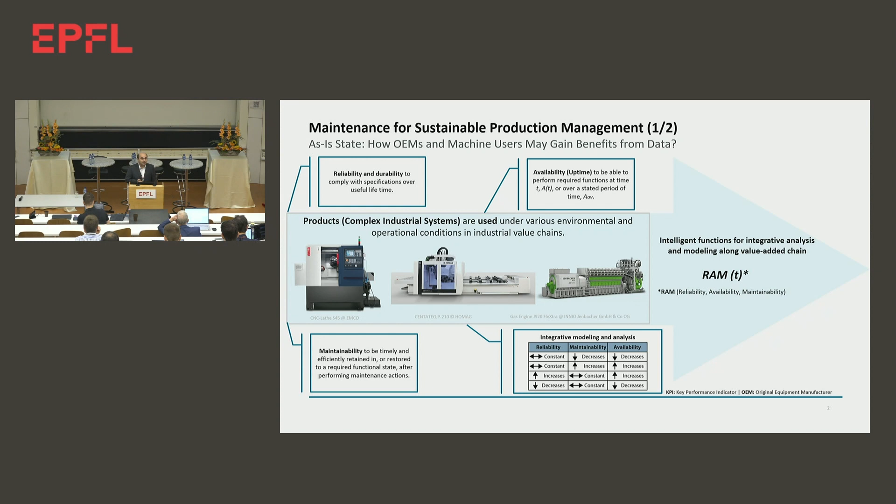So both sides, OEMs and machine users, share the view that they want to gain some sort of benefits from the data to build intelligent functions for integrative analysis and modeling of these factors. And in this indicator scheme, where we have theoretical relations between all these indicators and key performance indicators, what is missing is sustainability.

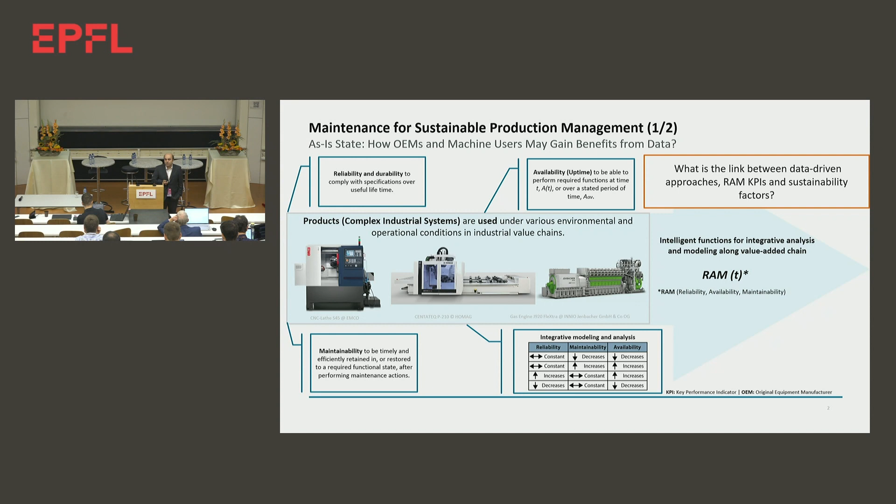So if we come into the problem space that we have with regard to sustainability, we could start from the triple bottom line of sustainability: the environmental conservation issues, the 2050 goal for reducing emissions and achieving net zero; then the economic enhancement, optimizing life cycle costing; and further on the social efficiency, reducing the most error-prone source of failures, that is human, actually.

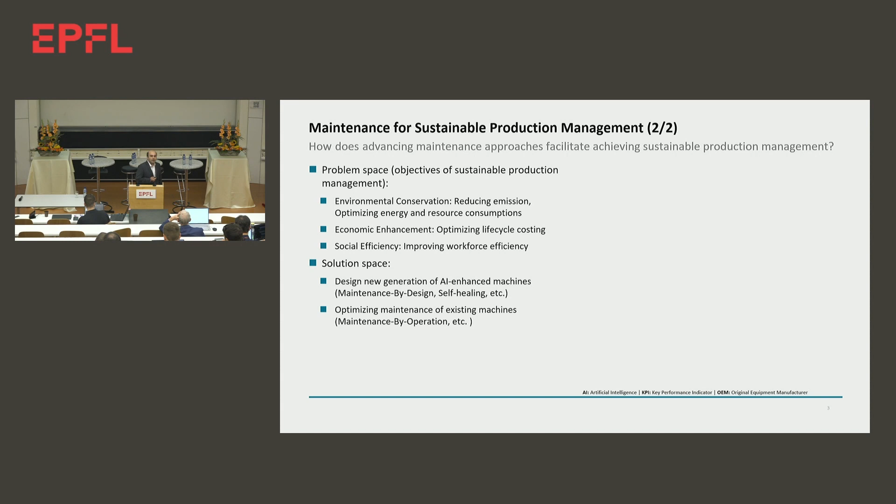And on the solution space, when we are really focusing on maintenance, we see that there are two major approaches. One is introducing new kinds of machines into the shop floors, AI-enhanced machines. So maintenance by design comes into discussion, and we have heard some talks about this topic from the side of the OEMs. And the other side is maintenance by operation, so extending the remaining useful lifetime of the machine.

And when we focus on the first research direction, we see that it has some sort of contradiction to the topics of sustainability, because we are putting a lot of resources, physical, virtual, and human resources, at the service of designing and operating these machines in the shop floors.

So the research question for us over the past, let's say, 7 years concerns the use of multi-channel data sources and existing prior knowledge, as well as human experiences, for increasing efficiency in the planning and operating of maintenance activities. When I talk about maintenance optimization, I refer to the operational, tactical, and also managerial issues that we have, all data-driven, and relating those aspects to sustainability.

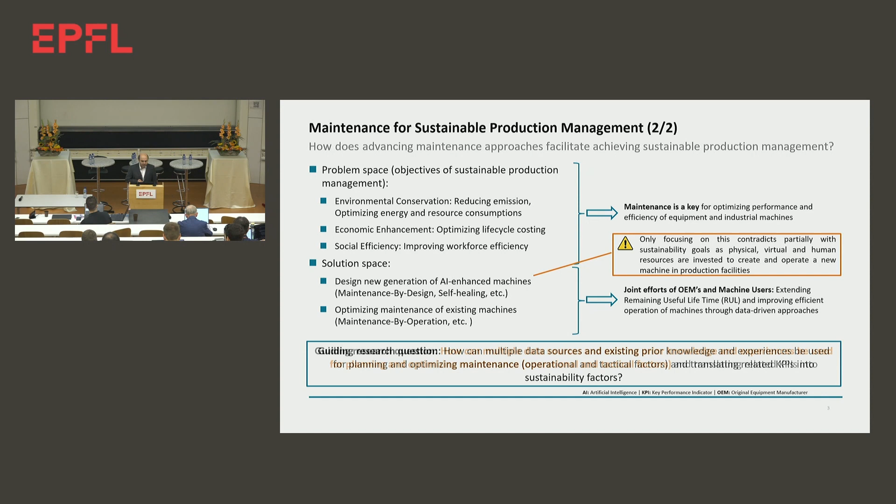So as an impulse, we believe that maintenance is the key for optimizing performance and achieving sustainability, and the joint efforts of OEMs and machine users are demanded to achieve this goal. So let us continue with this topic of knowledge-based maintenance to make it a little bit more understandable for you.

What we mean by knowledge-based maintenance is integrating predictive and prescriptive maintenance. It is based on top of condition monitoring and the other approaches that we use for automatic diagnostics. When we talk about predictive and prescriptive maintenance, there are certain challenges that we need to consider. First of all, the well-known challenge of proper use of multiple data sources.

Then on top of this is the suboptimal use of multi-structured data. We mainly focus on the sensors, forgetting the huge amount of so-called textual data, for example. And when we have multi-structured data, we need to deal with the multimodality of the data. So we need to establish some sort of semantic relations between the information that we are extracting out of the data, either structured or unstructured.

And not forgetting that in the companies, we have multiple strategies for operating the machines: different, sometimes contradicting, reliability-centered and maintenance strategies.

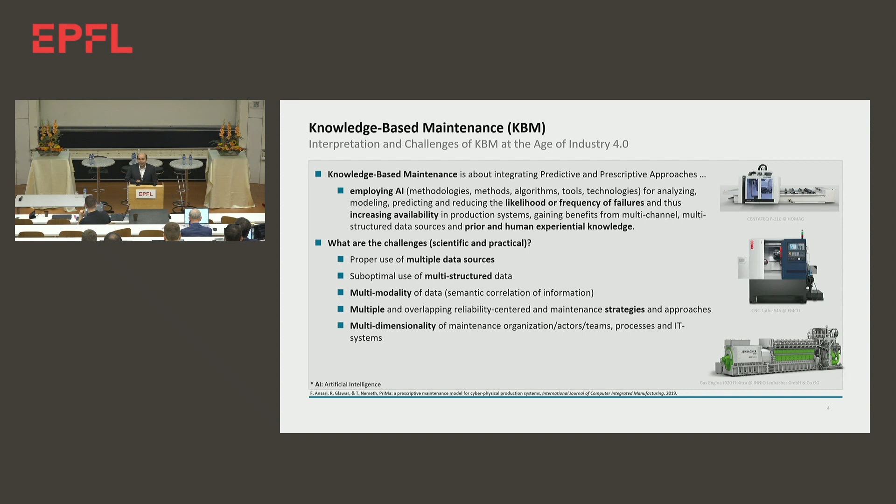And beside of this, we have multidimensionality of the organization in the maintenance, different actors that we have, and in fact, heterogeneous IT landscapes, which are evolving in the companies over the years.

So to make it more understandable in the context of global production and manufacturing, we could assume that we have a kind of CNC machine, an identical one standing in different shop floors all around the world under different operational and environmental conditions. What we get from the OEM, actually, for the object-oriented analysis is a quite rich database, including the failure modes, possible severity of those, causes, risk, and so on. And this could be well used for the machine itself and different subsystems of the machine.

But not forgetting, when we talk about unstructured data, a quite rich database is textual data. And those kinds of data that you get as maintenance reports in different qualities need to be pre-processed and need to be quantified, in fact. We need to know what we want to gain out of the textual data when we are analyzing.

And another source of the human experiential knowledge as well as the unstructured data is, in fact, cases that we are resolving. And each case consists of a problem and a solution that we are providing. And those solutions are sometimes similar for certain problems that we have. And we should not start the solving of a problem from scratch. These processes can also be automatized using similarity learning approaches, case-based learning in that case. And not forgetting that in the production, we have a quite rich database of production plans and production schedules.

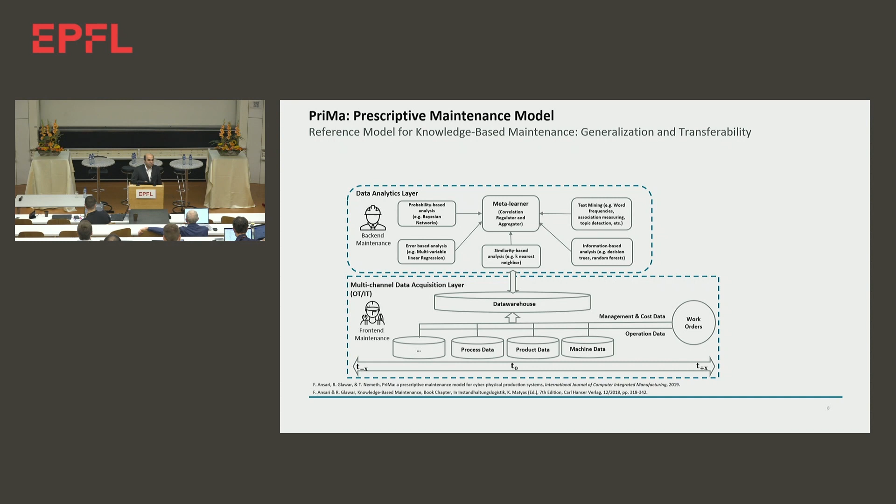So if you want to bring this into reality, we have thought there are nice approaches, but we need to have a kind of a reference model for this. And we have introduced it in a number of publications, the so-called prescriptive maintenance model, PRIMA, which consists of 4 modules, actually. Very abstract to say. The first module is the multi-channel data acquisition layer. On the top of this, we have the data analytics layer dealing with different types of data, structured and unstructured data. And on the top of this, we have, of course, the recommendation layer, like any kind of expert system.

But this loop won't be completed if you don't have any kind of a semantification layer, linking your prior knowledge that you have in your knowledge bases to the new knowledge that you gain, and vice versa, storing and preserving your new knowledge that you gain through every instance of decision-making and prediction. We are generating some sort of new knowledge and insight. If you are not integrating this into your knowledge base, you're losing your knowledge in between. So we need to close this loop, actually.

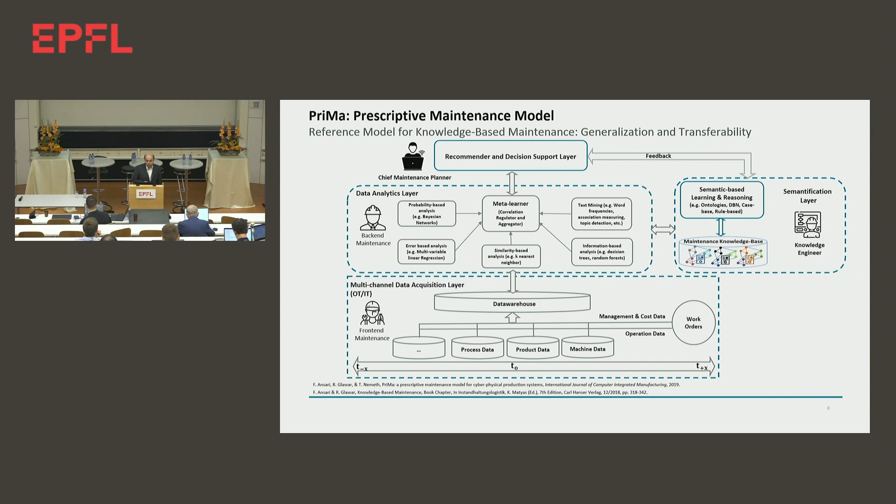And these 4 modules are coming into discussion to build a kind of a knowledge-based maintenance approach. And this was a basis for conducting a number of projects over the past years, based on each module or integrating some aspect of these modules together with the industry or with the research partners. I would like to take one of these projects, which we have conducted over the past years with semiconductor manufacturing, with Infineon in Austria.

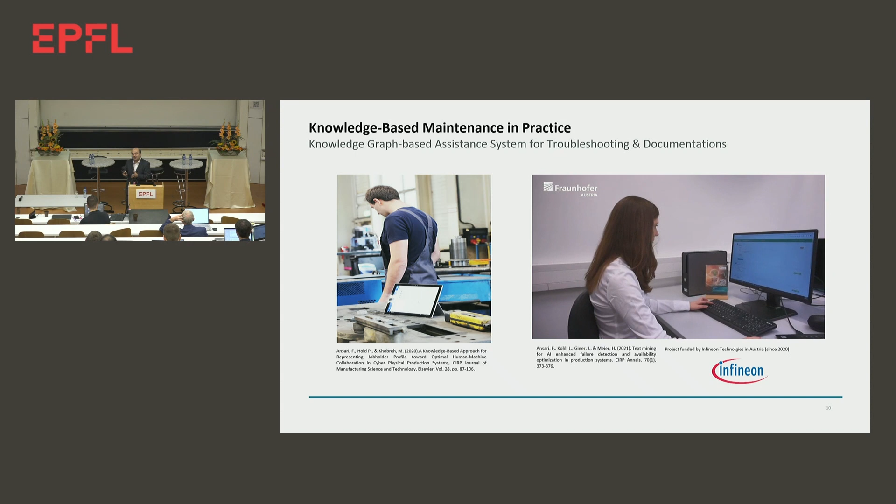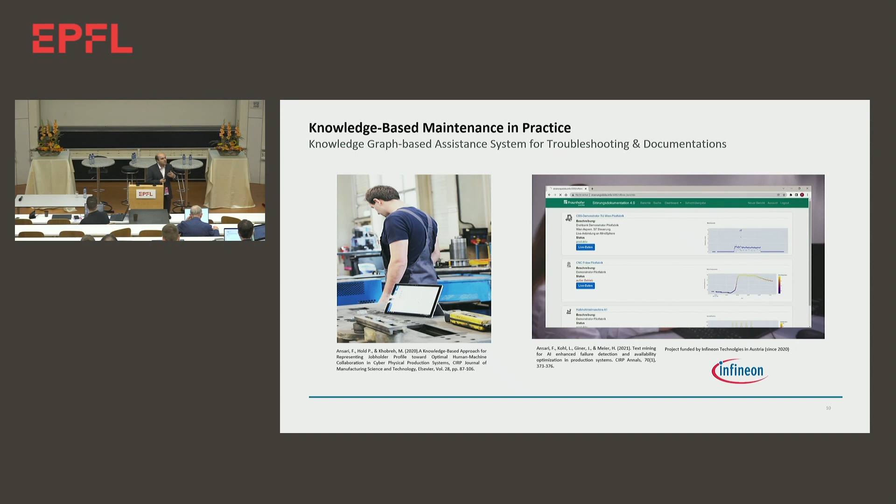And we focused in this project on the use of textual data. And we asked what useful information we could extract out of this textual data that they have had in the semiconductor for many years. They have a good system for recording documentation. Those are, however, in different quality and in different languages. You know that this is not always German, and if it is German, it's with different dialects and different types of formulations. So it's quite difficult to understand the syntax. So we needed to understand the syntax and build up some sort of ontology on the backbone of this to identify the terminology. And then the question was what can we gain out of analysis of the textual data?

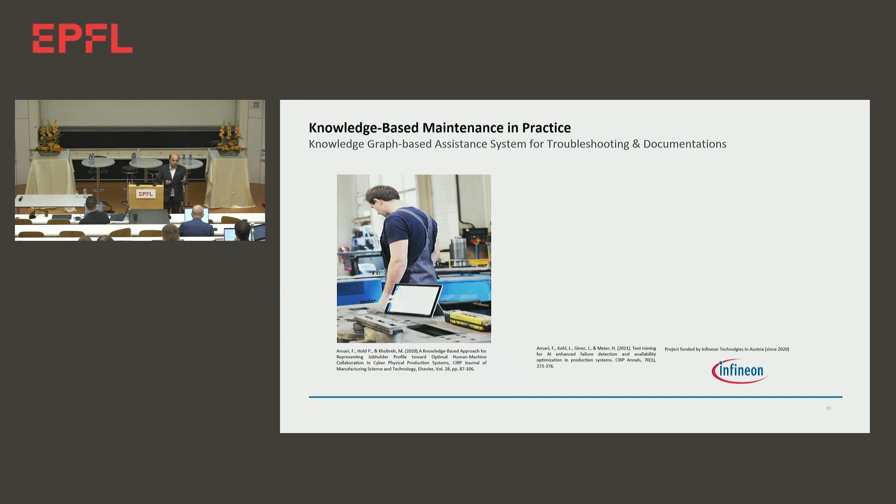So we could quantify this, and as far as we have in the documentation the timestamps for the reports and so on, we could gain some sort of knowledge. So we decrease the reaction time to the failures or to the problems that are reported. So you have sensor data on the machine that reported something, you get an alarm, but you have also the insight of the maintenance engineer that visited this machine and could provide some sort of feedback. These could be linked to each other and will enrich our database and enrich the basis for our decision making.

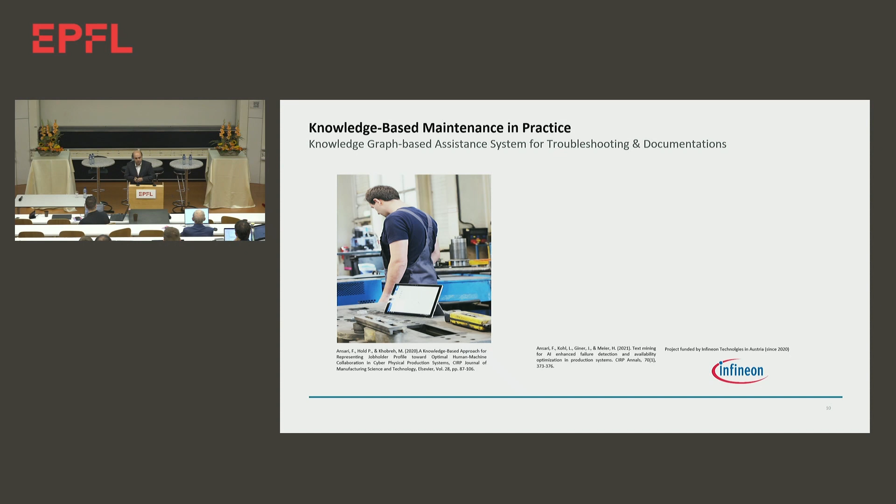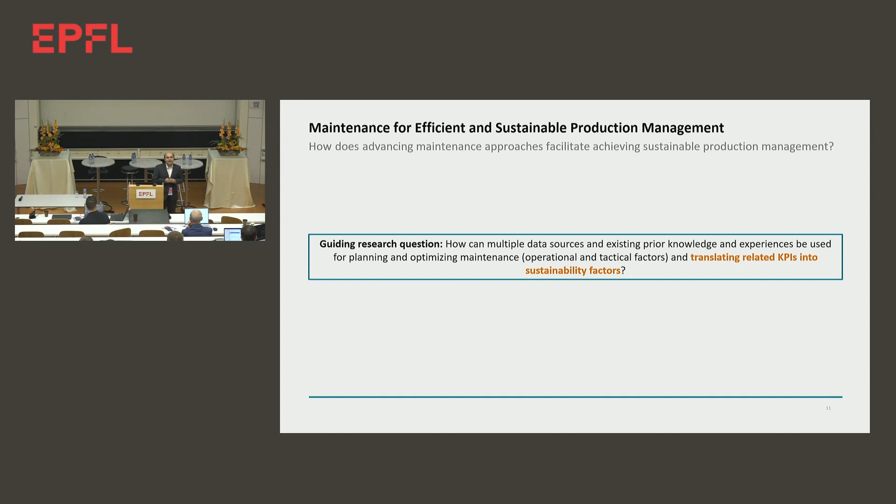So that was, in a nutshell, very quickly in the afternoon, about knowledge-based maintenance and its impact on efficiency. But what about the second part of my question? This is ongoing research that we do with our PhD candidates in the research group with regard to sustainability. We are working with the keyword sustainability-driven maintenance. But what does it mean, actually? When we are looking at sustainability with regard to maintenance, we need to find a kind of a basis to integrate sustainability into the maintenance indicator schema. And one that could be well interpreted by many of the companies is the OEE.

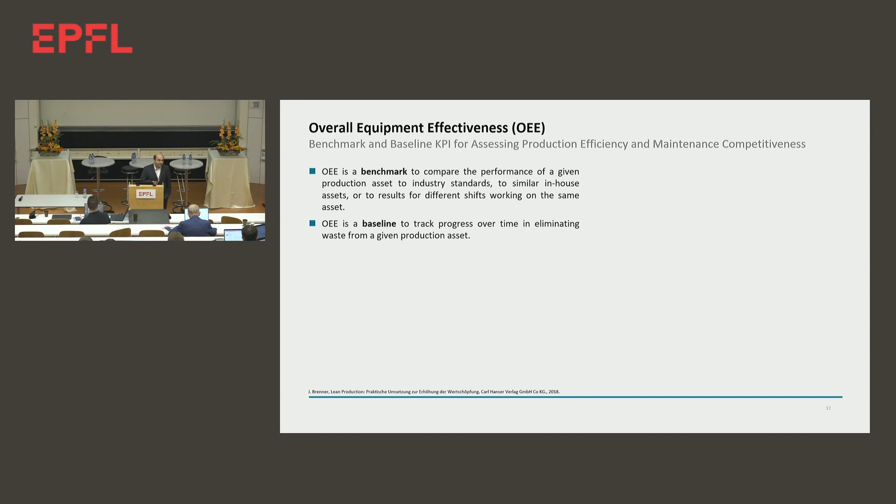So OEE is a benchmark to assess the production efficiency and maintenance competitiveness. I'm not jumping into the formulation of OEE, as for most of you it is well known, but it consists of different losses in availability, in performance, and in quality. And it considers truly productive manufacturing time. So losses in schedules and utilization are not considered with this. So the question that could be extended here is, how can we correlate the OEE losses to sustainability factors and introduce a new measure that contributes to efficiency, lean, and at the same time sustainable production?

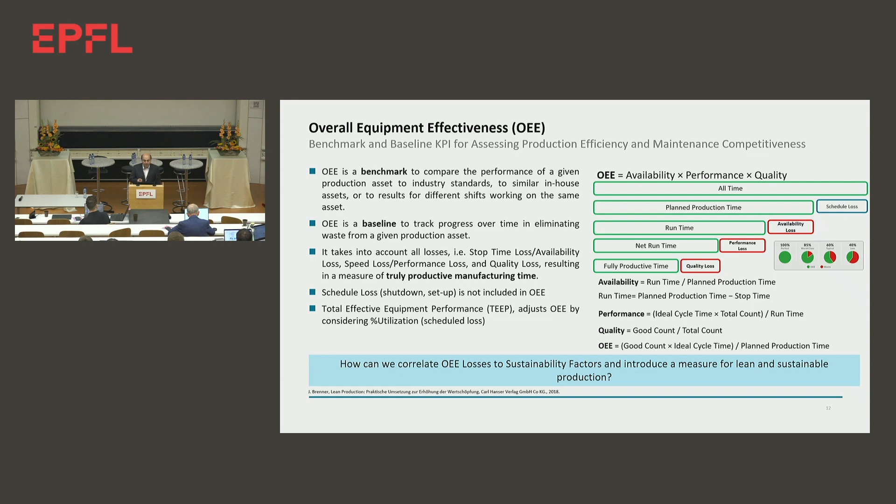So with this, we can elaborate on each of the losses that we are modeling. So our knowledge map could be elaborated. We have different sources, such as system availability issues, for example, that are contributing to different aspects of our sustainability triple bottom line. So related to the economic factor, related to the human factors when you think about the human error rate, for example, or related to the environmental issues. Those need to be labeled, first of all.

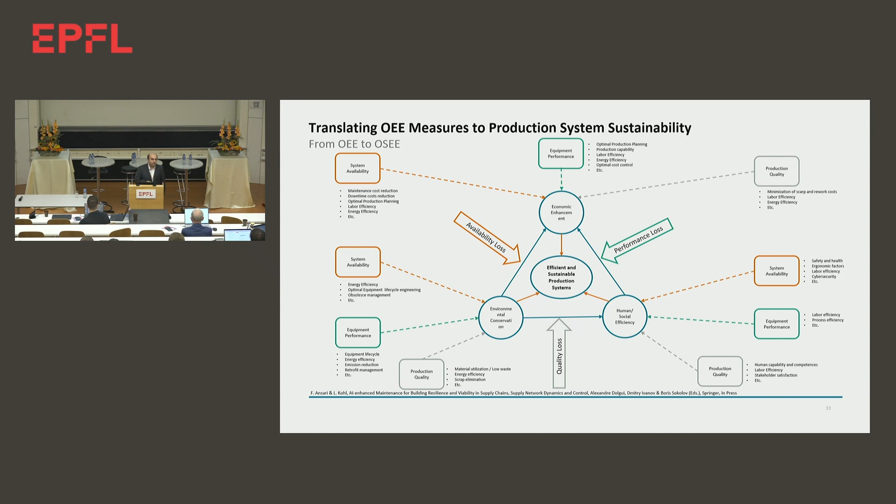And then we have other types of losses that we have. But these are still with regard to the existing OEE and the state of the art. So it's still not contributing to sustainable production management. What we need is an extended indicator, so that we are considering the overall sustainable equipment effectiveness in that sense. And in this regard, we need to elaborate on a new damage or loss model,

considering the environmental factors. But you see most of the research in that sense is focusing on the footprint of the materials. And the databases that you have are mostly focused on the products, like SimaPro or GaBi and so on, not focusing on the processes. So this needs to be investigated. I leave it open for discussion. There are, however, other sources beside CO2, so we could think about other types of emissions, waste, and so on.

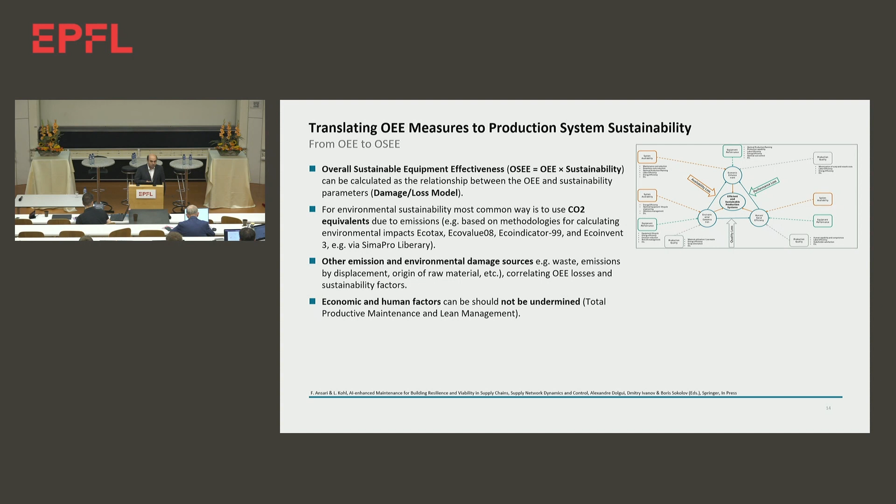And not forgetting that in this context, other management concepts like retrofit management and so on should be linked to the maintenance management portfolio that we have. And not forgetting that although the environmental factors are boundary conditions, and we are not allowed to compromise them theoretically against the economic factor, there are certainly economic factors for the companies, and human factors, that need to be considered and not undermined. So, a realistic way of approaching sustainability.

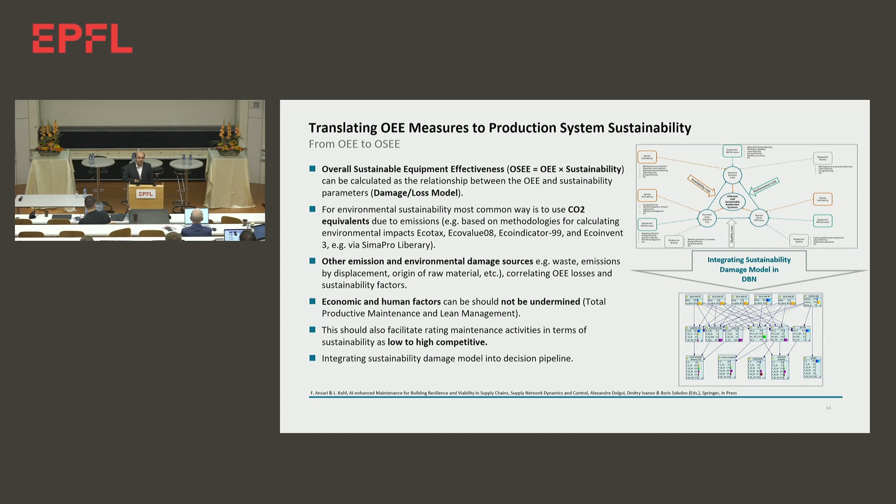And then if we are introducing such a damage model, or at least part of that, then we are able to extend the scope of OEE and assess the competitiveness of our maintenance activities, not only with regard to efficiency, but also with regard to sustainability. And this could be introduced as one extension to our Bayesian network, the dynamic Bayesian network that I introduced on the former slides.

So quickly, to keep with the time, to summarize, in our context of research, we still have certain challenges that are shared with most of you. We are talking about the existence of data. I shouldn't talk about it in this community; this is quite well known. But what matters for knowledge-based maintenance is the correctness and validity of the data, especially sustainability-related data. Those databases, where we need longitudinal data, need to be well validated. And then the correct interpretation matters when we approach knowledge-based maintenance.

And this correct interpretation is not only on the side of the algorithm itself, but also on the side of the human. So we need explainable AI to help us understand the findings and interpret them in the right way, depending on the context and domain that we are working in, and at the same time training and upskilling for the workers and engineers that we have at the companies.

Not forgetting that this approach will become more complete and comprehensive if we consider human experiential knowledge more and more from the process engineers, maintenance engineers, blue and white collars, and employ other approaches that are very common in the context of, for example, digital twins, like simulation-based approaches, or what the group of Professor Fink does a lot, physics-based approaches that could be linked to this as well.